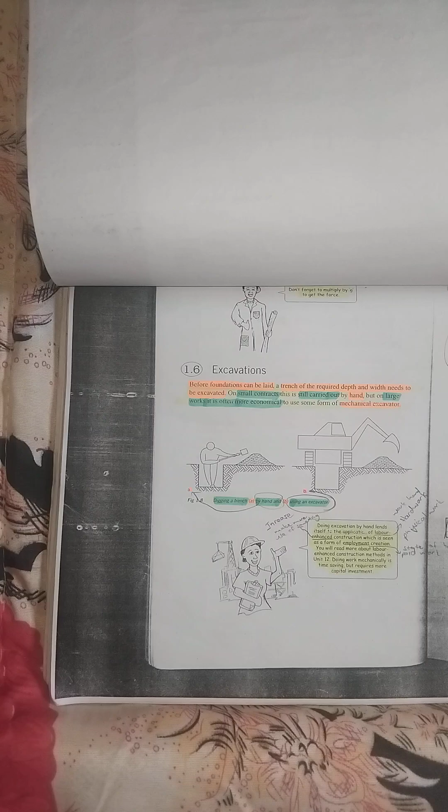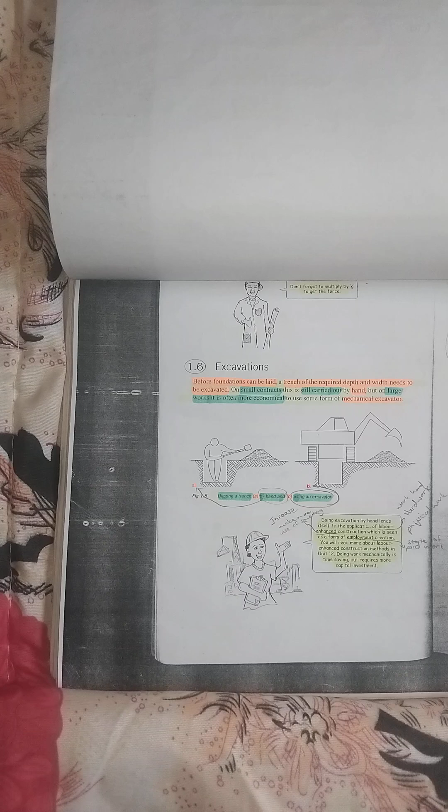Someone commented saying don't forget to multiply by G to get the force. So whenever you multiply mass with gravity, force equals M times A, mass times acceleration, and force equals M times G as well, mass times gravity. For those that know that formula, I think that's Newton's law, the one that states F equals M times A. And then you get the one that states F equals M times G.

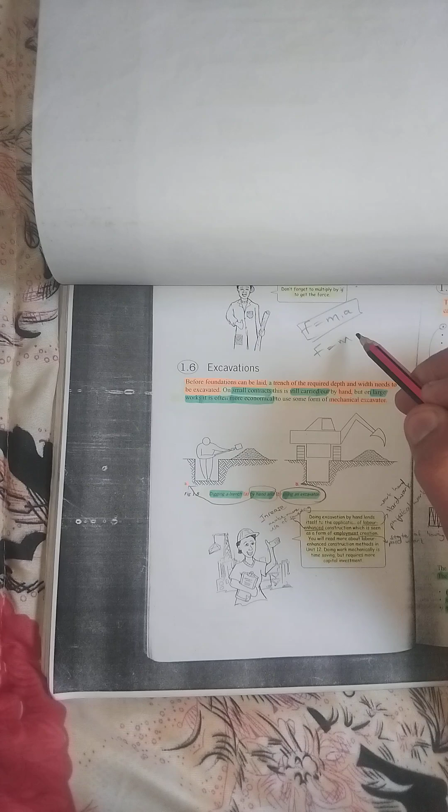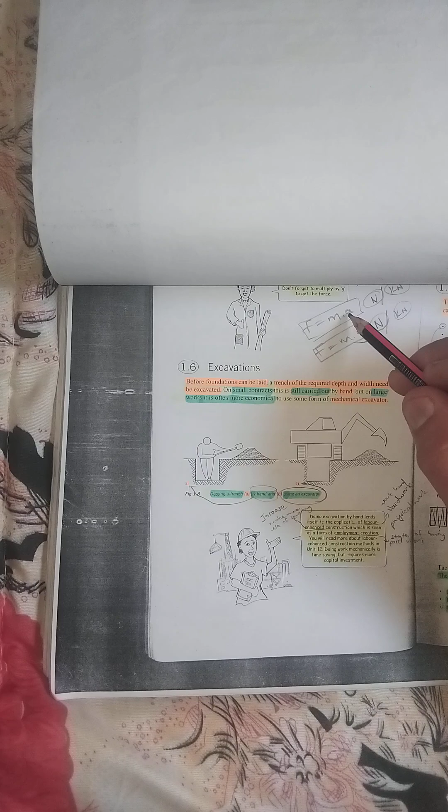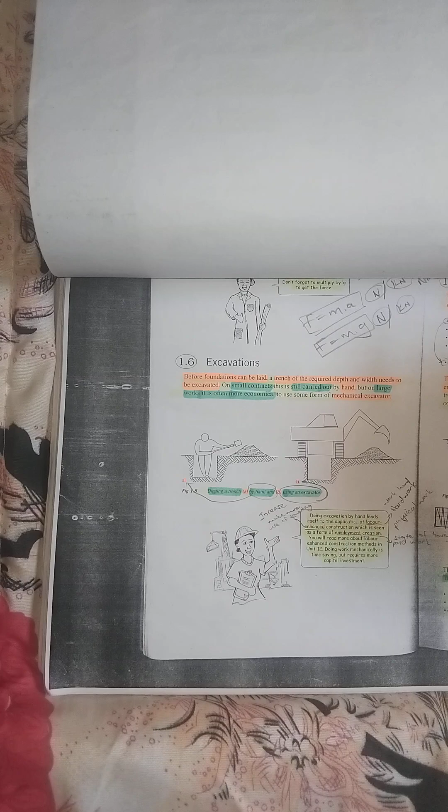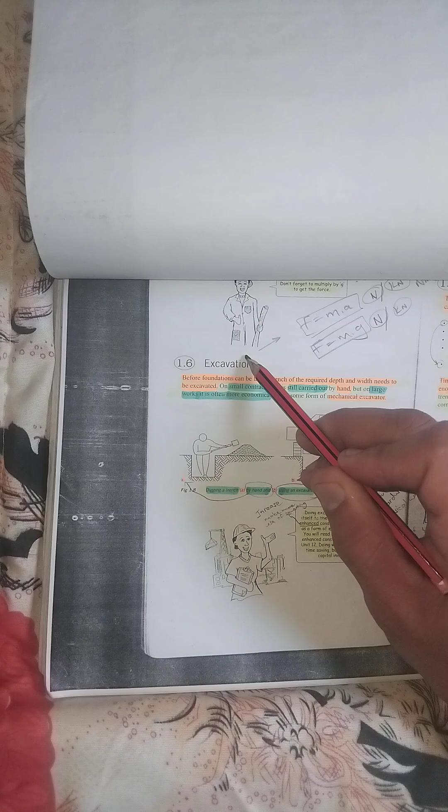Usually this is the system that we use for a car, so mass times acceleration will give you the force in a certain direction. Let's say that car is driving, and that car is a type of mass, but it's accelerating at a certain speed, and there's a force in a certain direction if it's going that way.

Same with mass times gravity. If there's a brick with a certain kilogram somewhere on a building, and it falls off the building, it's accelerating at a force, and that's the gravity law, mass times gravity. Mass times gravity, and that's how you get the force.

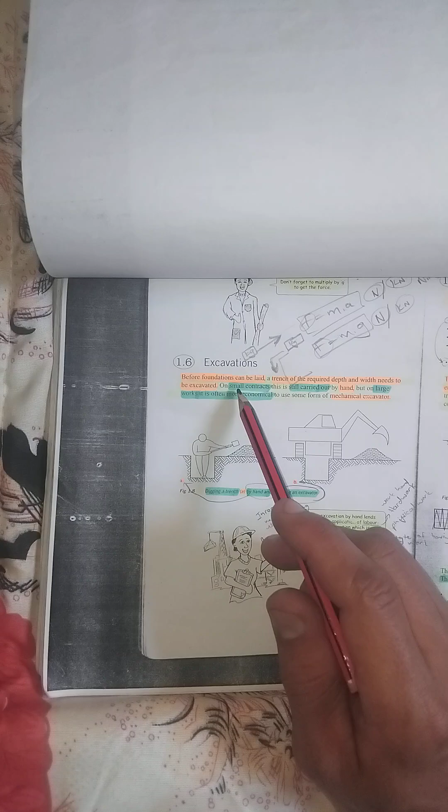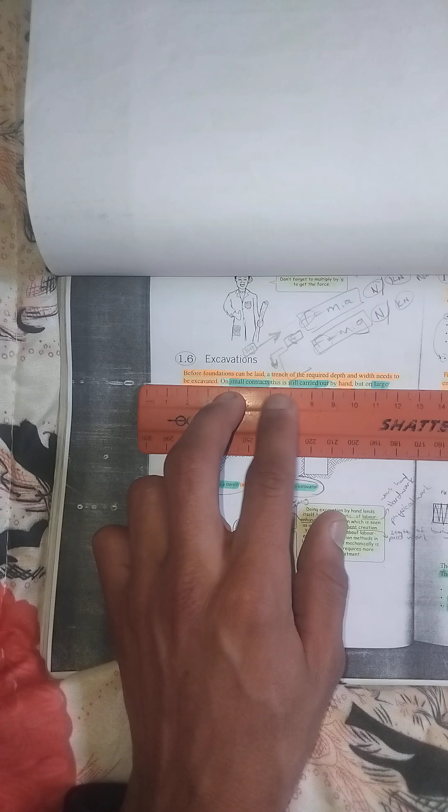Okay, so let's start. Before foundations can be laid, a trench of the required depth and width needs to be excavated. On small contracts, this is still carried out by hand, but on large works it is often more economical to use some form of mechanical excavator.

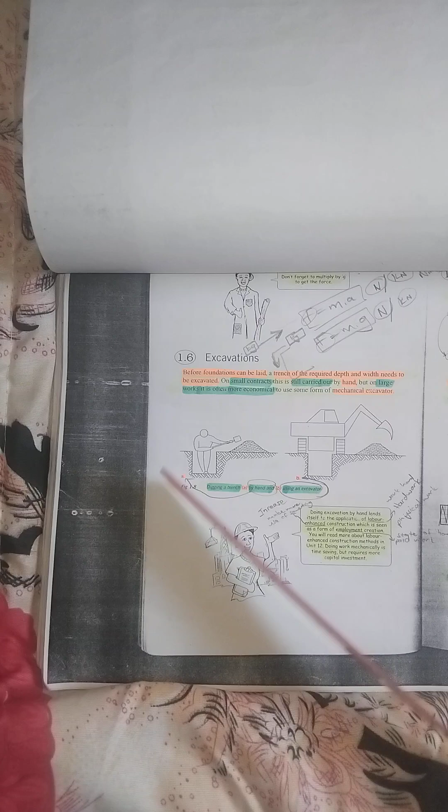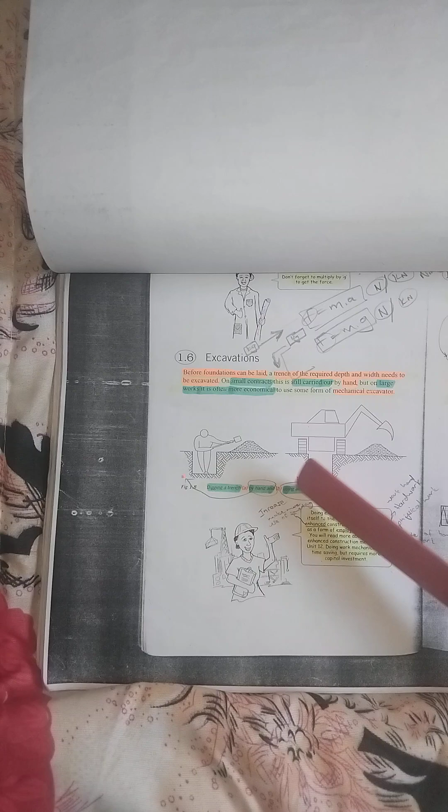So what they're saying is that on small contracts, excavations can still be carried out by hand because then it's not that difficult, and there aren't a lot of trenches. But whenever you deal with a big project, you should consider mechanical excavators, because then it's more economical.

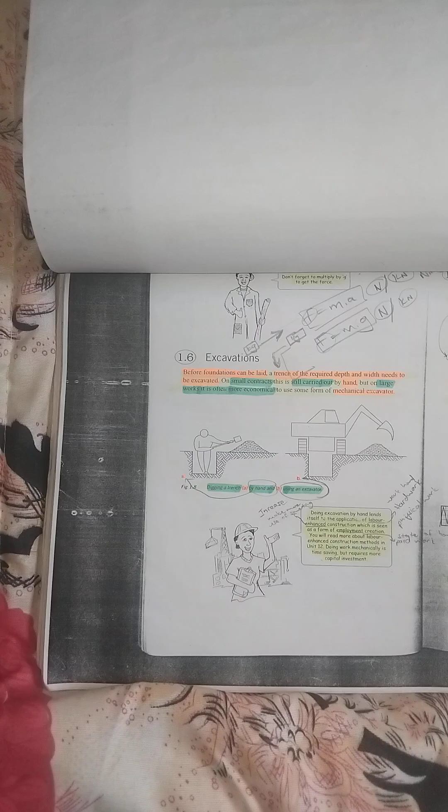And here we can see that they show A as a representation of digging a trench by hand, and B using an excavator.

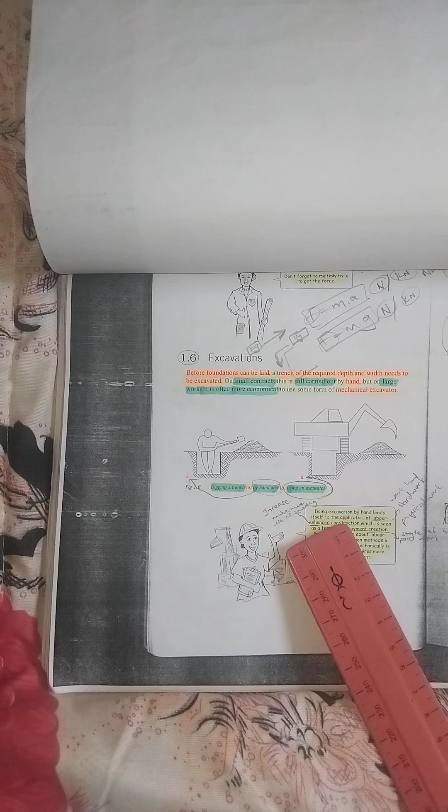Doing excavation by hand lends itself to the application of labor-enhanced construction, which is seen as a form of employment creation. You will read more about labor-enhanced construction methods in Unit 12.

So that's in the coming chapters, the coming units. Doing work mechanically is time saving but requires more capital investment.

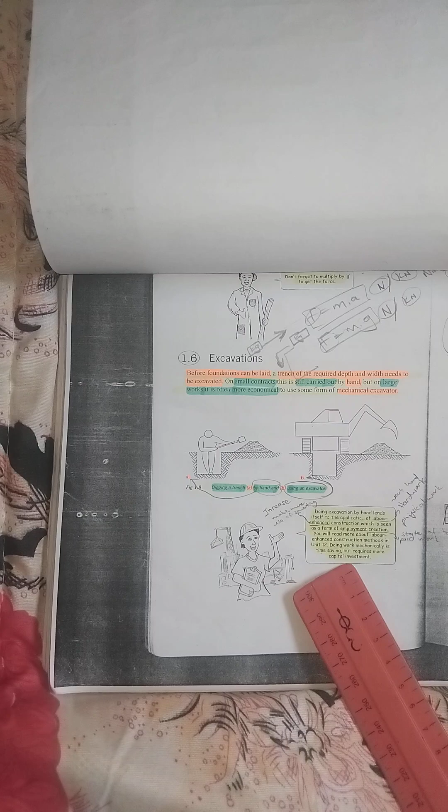Timbering is basically just using timber to box out your trenches. So timbering refers to the temporary supports for the sides of excavations. It is also called planking, strutting, and shoring.

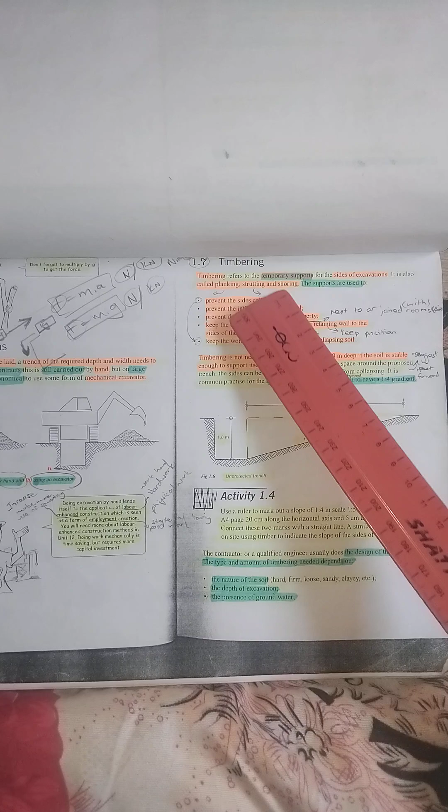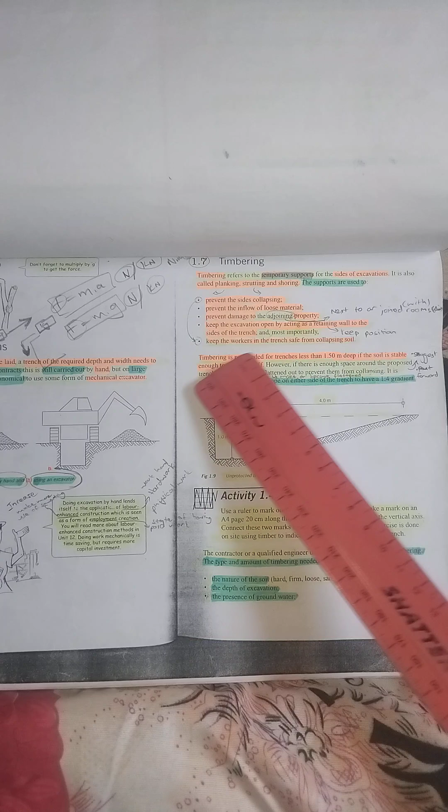The supports are used to prevent the sides from collapsing, prevent the inflow of loose material, prevent damage to the adjoining property next to the excavation, keep the excavation open by acting as a retaining wall to the side of the trench, and most importantly, keep the workers in the trench safe from collapsing soil.

So timbering is not needed for trenches less than 1.5 meters deep, if the soil is stable enough to support itself. However, if there is enough space around the proposed trench, the sides can be flattened.

It can be flattened out to prevent them from collapsing. It is common practice for the slope on either side of the trench to have a 1:4 gradient. So that's what they mean.

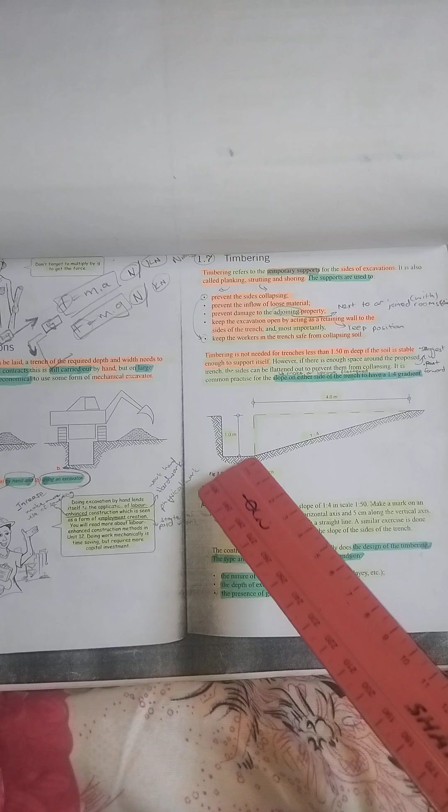If there's enough space around the proposed trench, so if you have a site and you're busy digging trenches and there's enough space next to the trench, then the sides can be flattened, maybe this way and that way, with a slope of 1:4. So for every 1 meter rise, you have a 4 meter span. You can span up to 4 meters for every 1 meter that you go up.

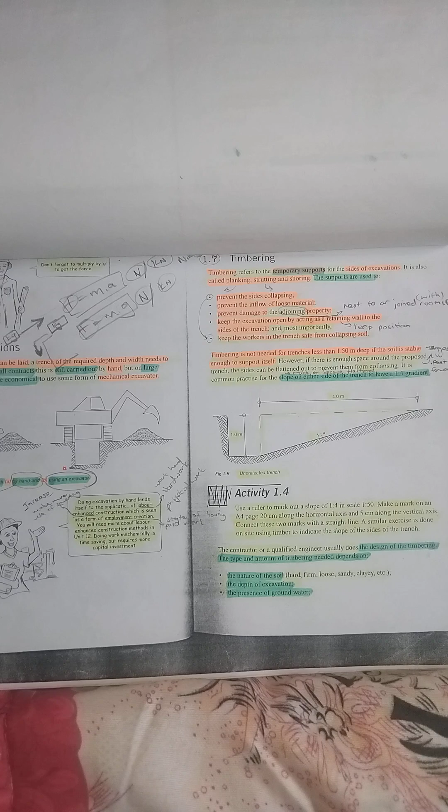And they also say that it's common practice for the slope on either side of the trench to have a 1:4 gradient, on either side.

And currently this is an unprotected trench.

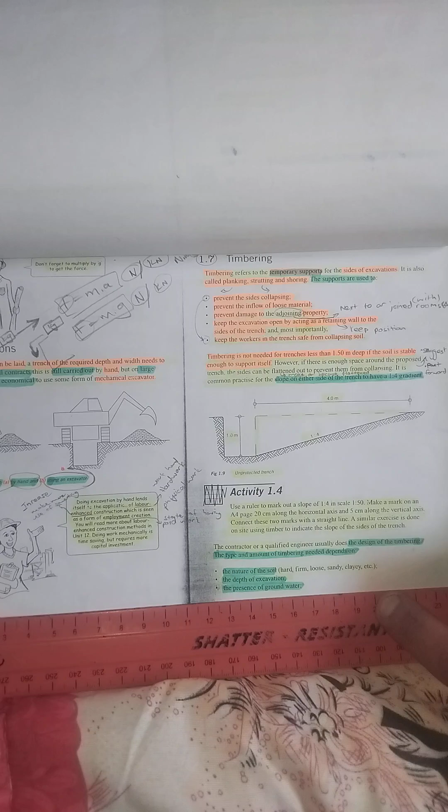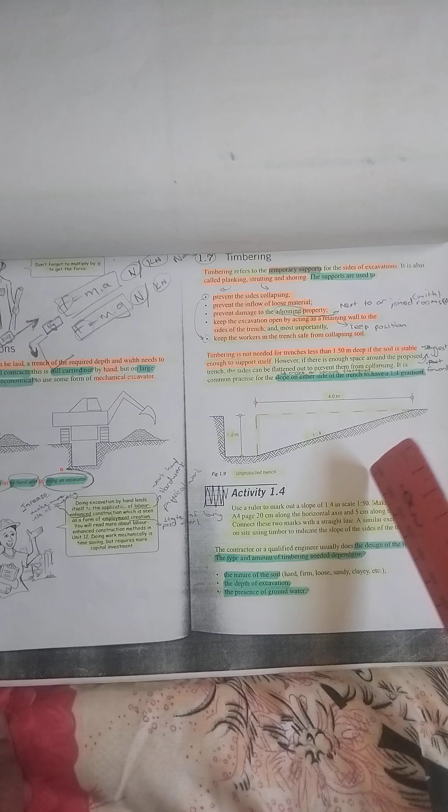Okay, so basically this is just an activity, but it's stating that you should use 20 centimeters in your horizontal plane, and then 5 centimeters in your vertical plane, and then you should just join the two lines to two end points, and then you will get the slope. That's basically what this activity is saying.

But then you should use a ruler to make out a slope of 1:4 in scale 1:50. Make a mark on an A4 page 20 centimeters along the horizontal axis and 5 centimeters along the vertical axis. Connect these two marks with a straight line.

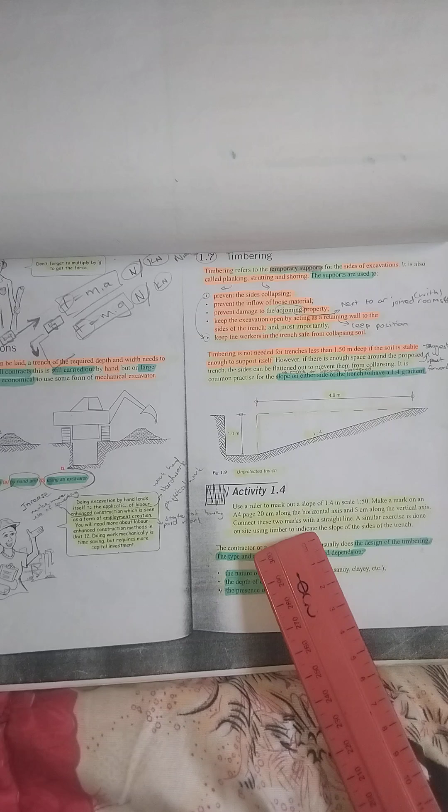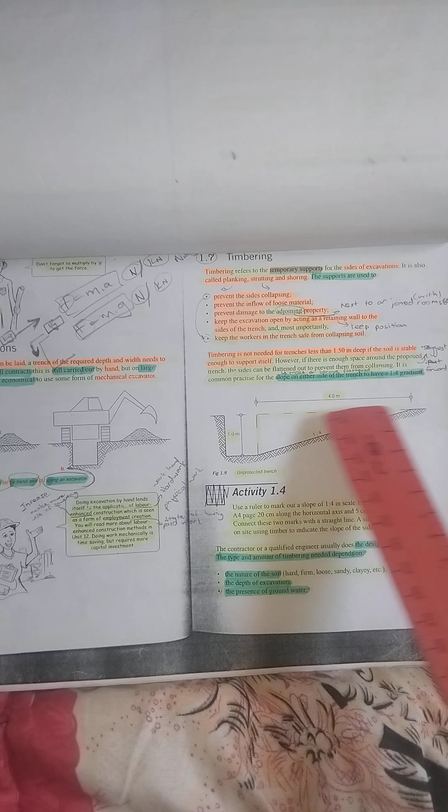A similar exercise is done on site using timber to indicate the slope of the sides of the trench. So I'm not going to do that activity, but it's basically almost the same as this: 5 centimeters vertical, and then 20 centimeters horizontally, and then you just join the 2 points, and you get the slope of whatever.

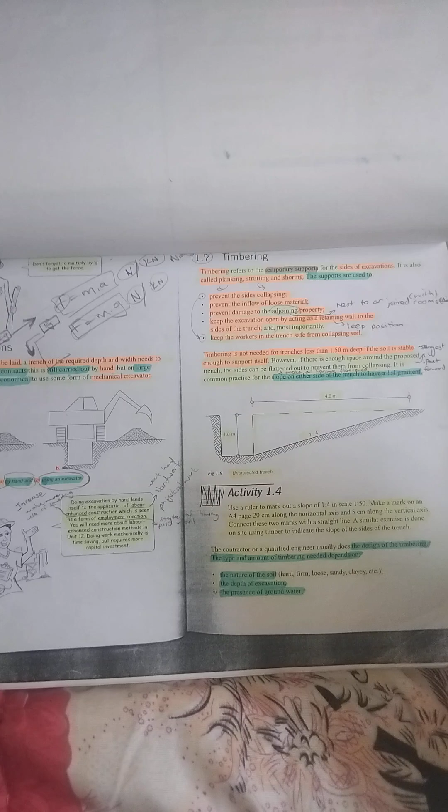So in this case it was 5 on the y and 20 on the x, so the slope is 1:4. That's how they got to 1:4.

So the contractor or a qualified engineer usually does the design of the timbering. The type and amount of timbering needed depends on the nature of the soil, which means if it's hard, firm, loose, sandy, clay, etc.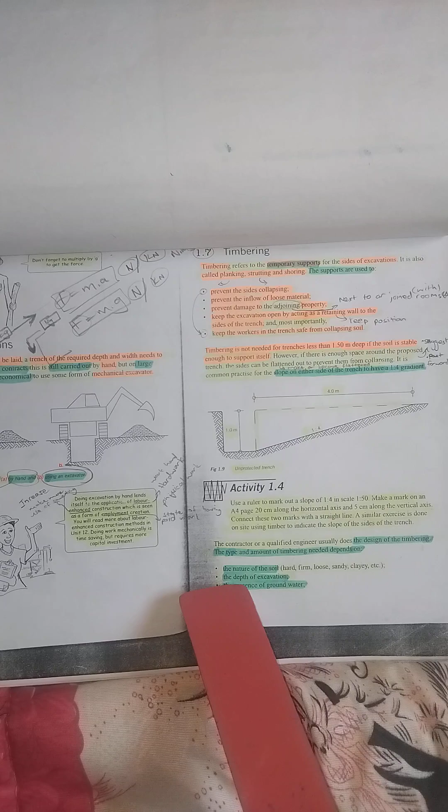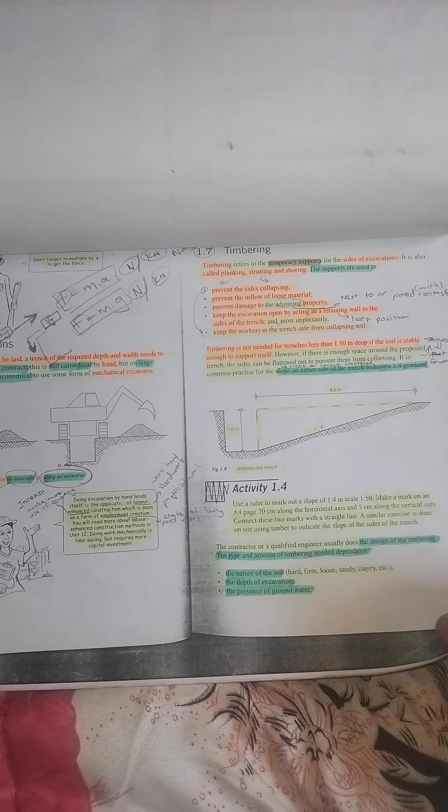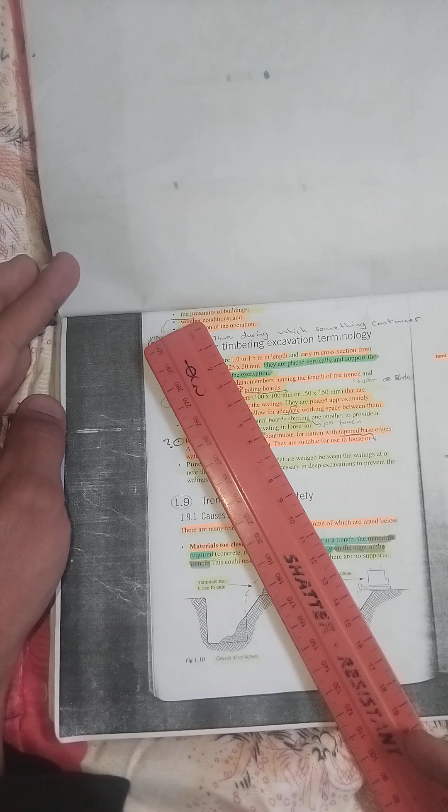The depth of excavation, the presence of groundwater, the proximity of buildings - so how close the buildings are to the excavation - weather conditions, and the duration of the operation, like how long will it be taking place, how long will the trenches be open, all of that.

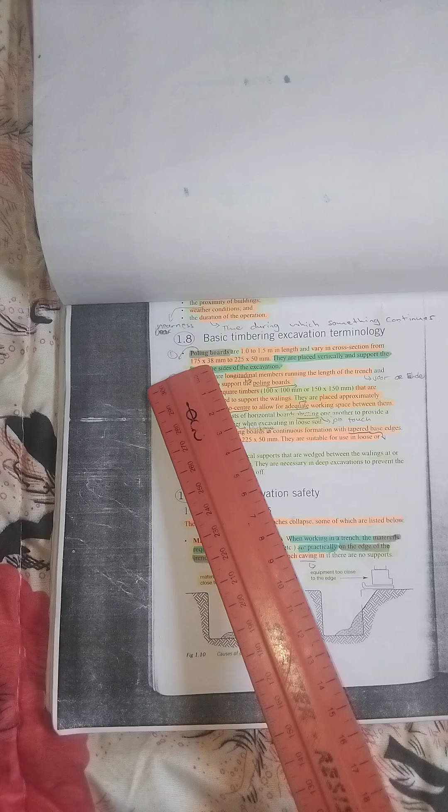Okay, so basic timbering, excavation terminology. Poling boards are 1 to 1.5 meters in length and vary in cross section from 175 by 38 millimeters to 225 by 50 millimeters. They are placed vertically and support the soil at the sides of the excavation.

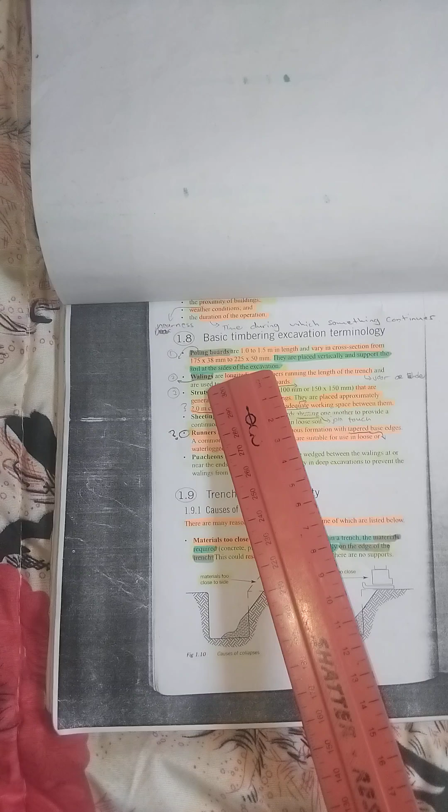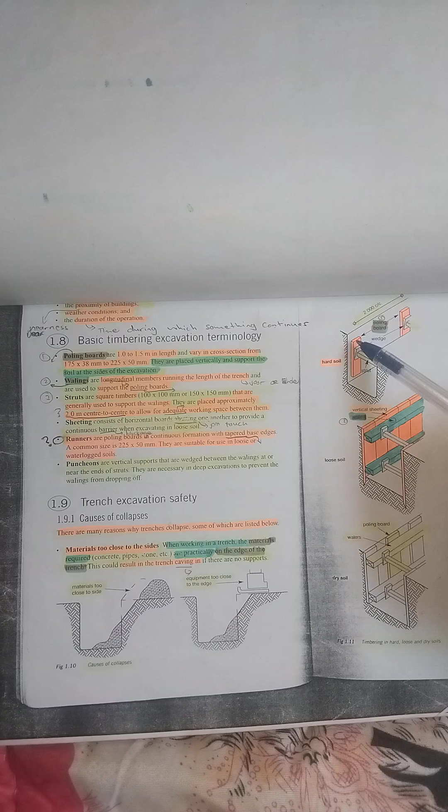So basically what I mean is if we look at this sketch, this is a poling board, that side and that side, the orange ones. Usually they're 1 to 1.5 meters vertically, and the cross section can be 38 by 175 millimeters, or 50 by 225 millimeters.

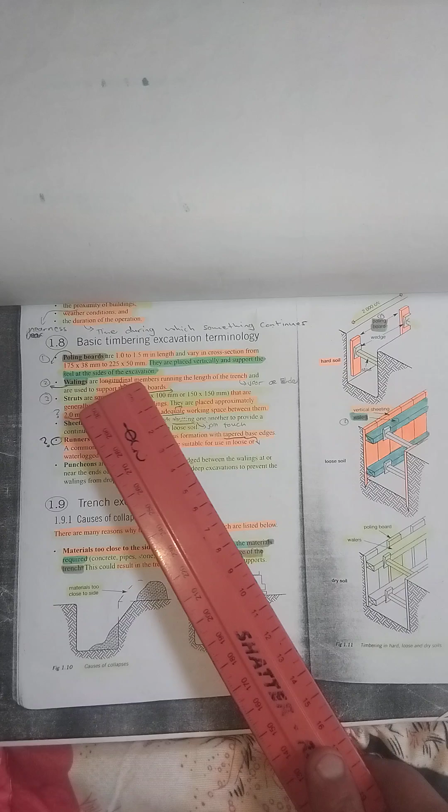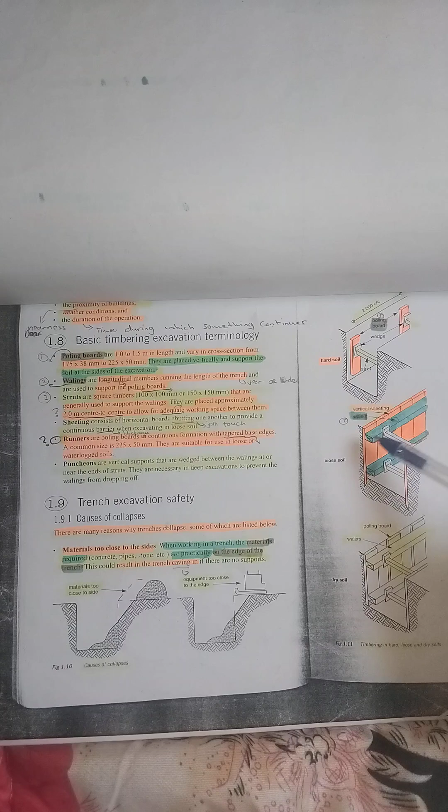And then you also have walings. Walings are longitudinal members, so horizontal members running the length of the trench, used to support the poling boards. In this case, these are the walers or walings, the ones in blue, and they support your poling board. The poling boards are the vertical ones, the orange ones, and your walers just support the vertical sheets, the poling board.

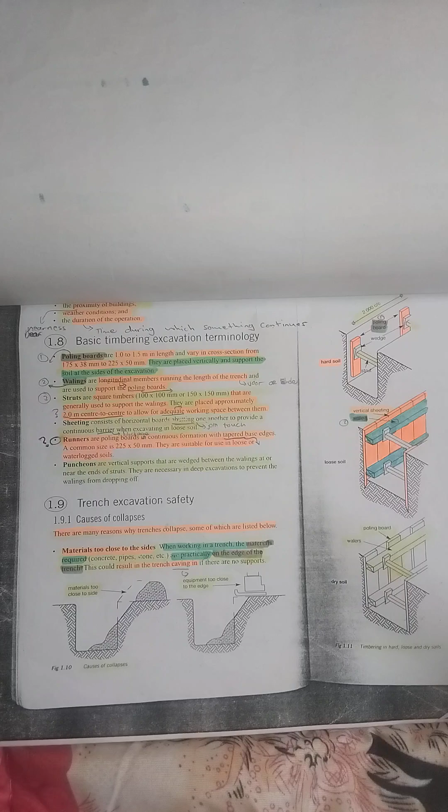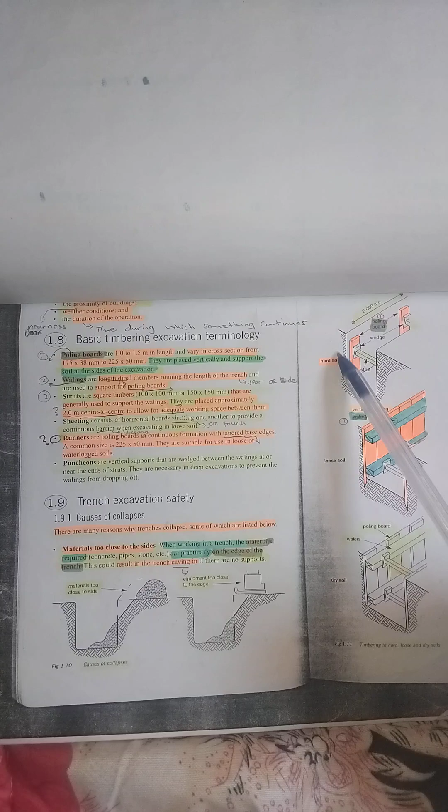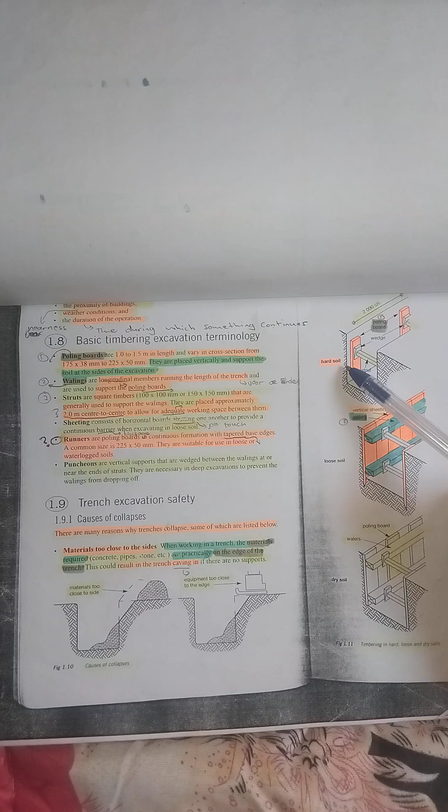And usually the conditions here, this one you use for loose soil, and this one you use when you have hard soil. But I'm assuming hard soil conditions can also be wet, like when it's very rocky but wet, like near a river - but the soil is very hard.

This is if you have loose soil, and then you get dry soil - maybe it's hard soil but dry, or loose soil but also dry conditions. I'm assuming dry soil conditions can be stable, it's hard soil but dry. For this it can be wet as well, the soil can be wet, it doesn't matter.

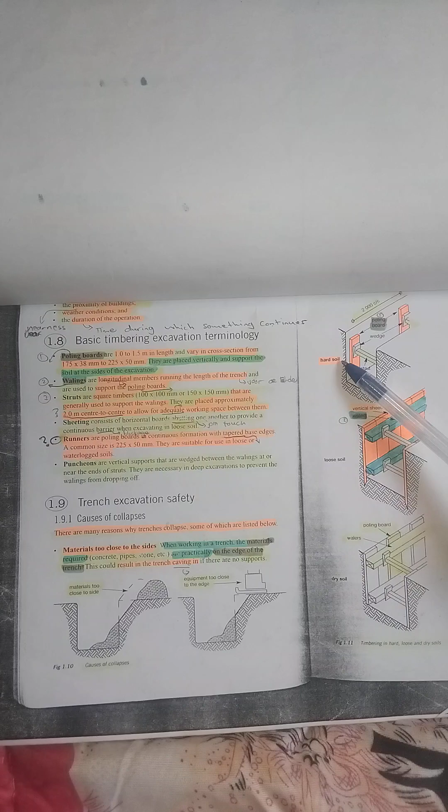Like according to your engineering design, maybe geographical studies show the soil is hard, then you don't need to use a lot of poling boards even if it's a wet condition. But if it's dry soil and the soil conditions, due to your studies, aren't stable, then you have to put poling boards maybe every second phase.

Let's say this is a phase, first phase, second phase, or you leave a space open in your second phase, then you put a poling board. That's what I'm assuming.

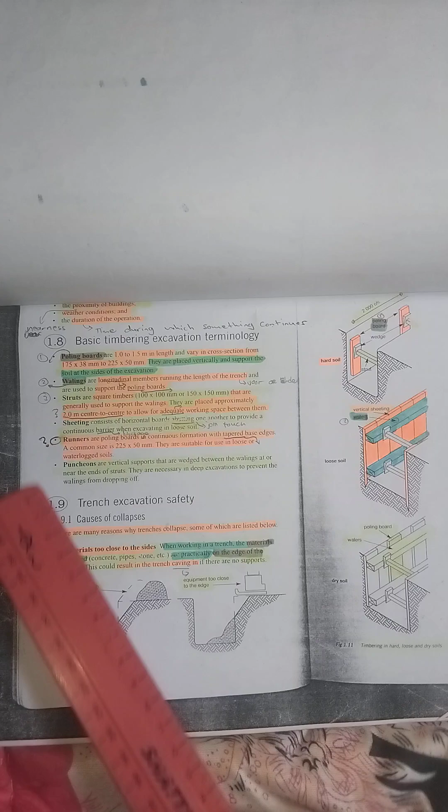So let's just see what they see as a strut. In this case, struts are square timber, 100 by 100 millimeters or 150 by 150 millimeters, that are generally used to support the walings.

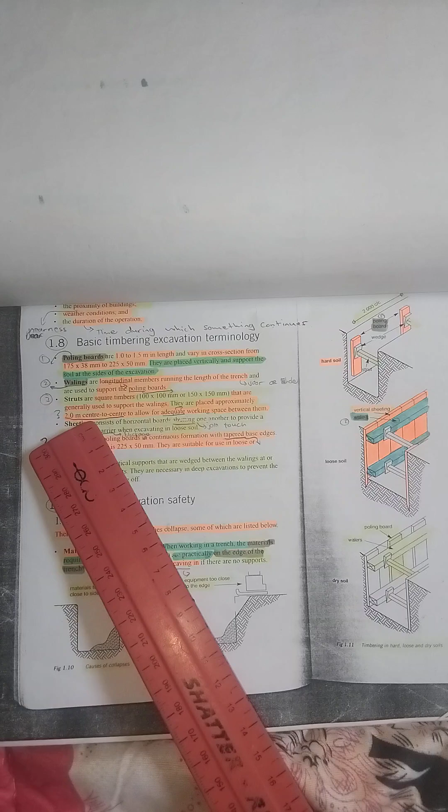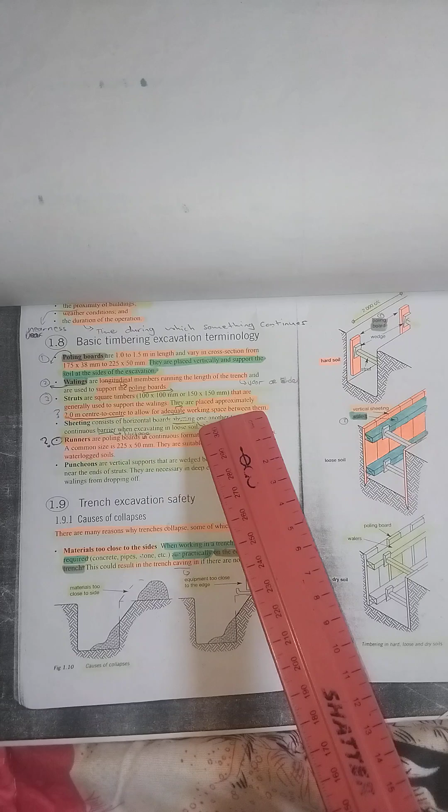They are placed approximately 2 meters center to center, which means 2 meters, 2 meters, 2 meters, if the trench is running in that way, center to center, to allow for adequate working space between them, so that the trench workers, the people in the trench, or maybe the excavator doesn't make contact.

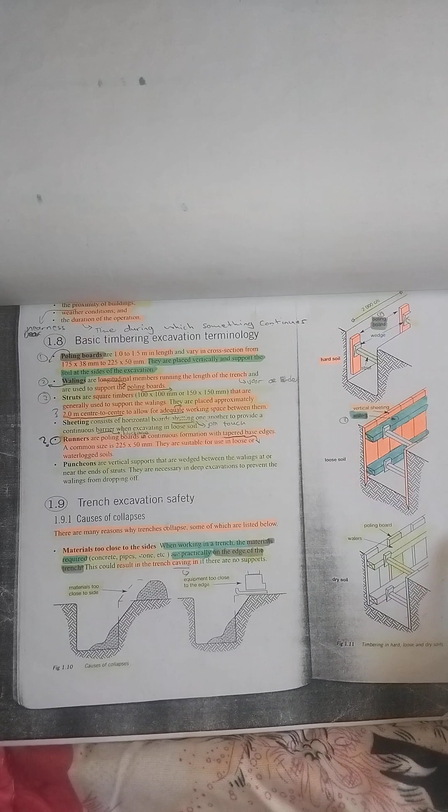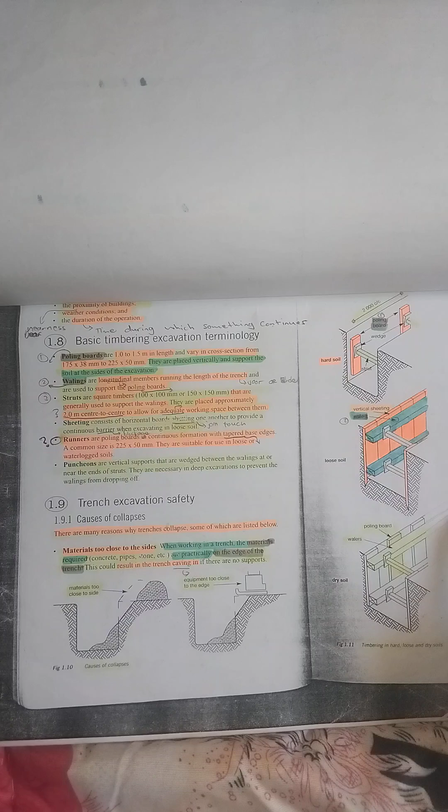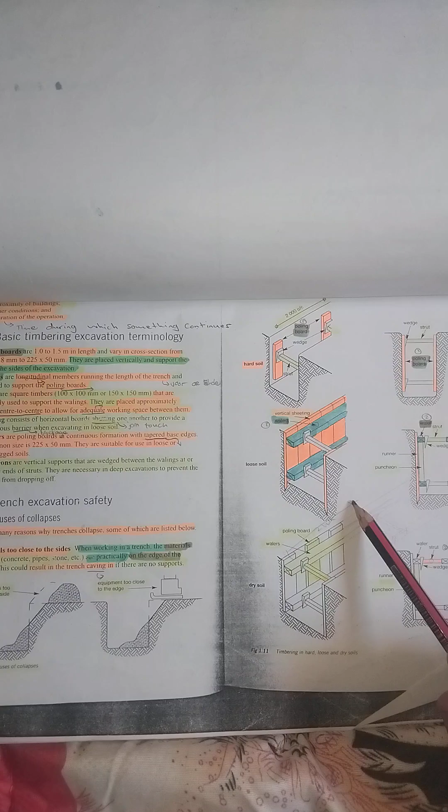So every 2 meters you have, like if the trench continued in this direction, you would have had one sitting here, and you would have had one sitting here as well. So the distance from here to there would have been 2 meters. Every 2 meters you would have had one. That was that board. So it would have been like if this was another strut, 2 meters apart from each other, if the trench had to continue in that direction.

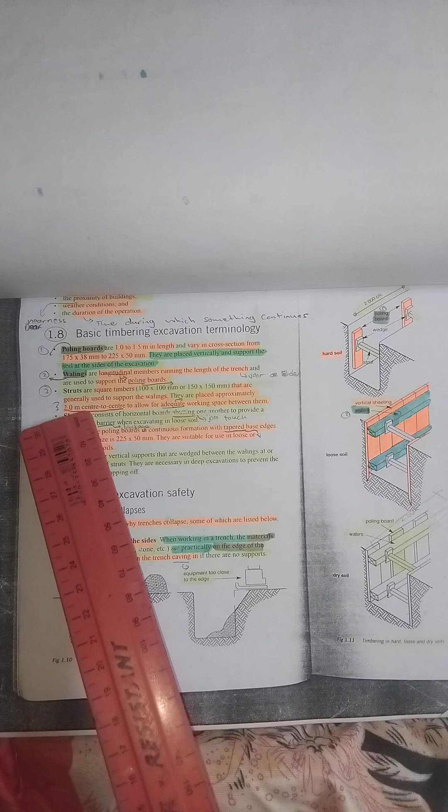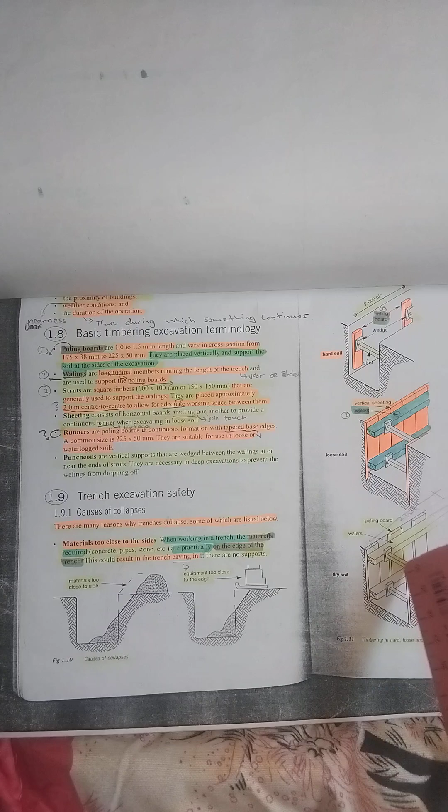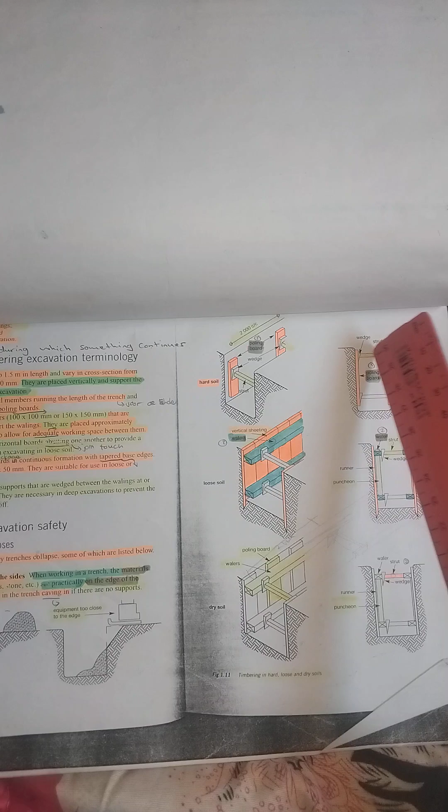So basically the strut, the one that I just went over now, that says it's 100 by 100 millimeter or 150 by 150, is that square piece, the yellow one. It's the yellow one, sitting there. We call that a strut. That's the strut there, the yellow piece here.

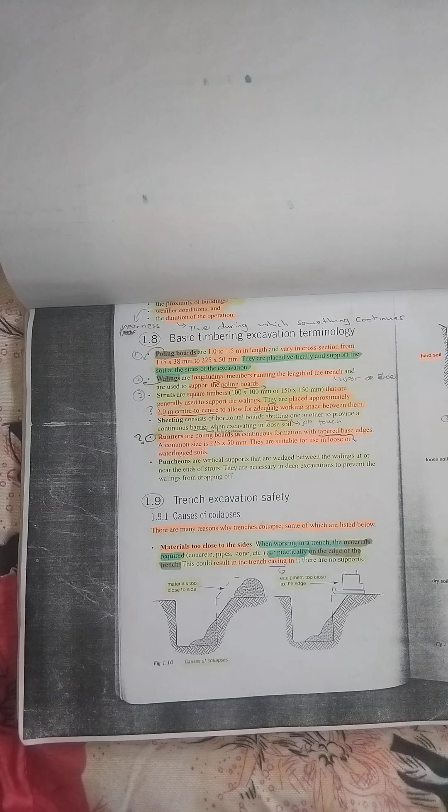So it is basically causing a force onto your walings, onto the blue sections. So it's basically just preventing the trench from collapsing. So that's the one supporting.

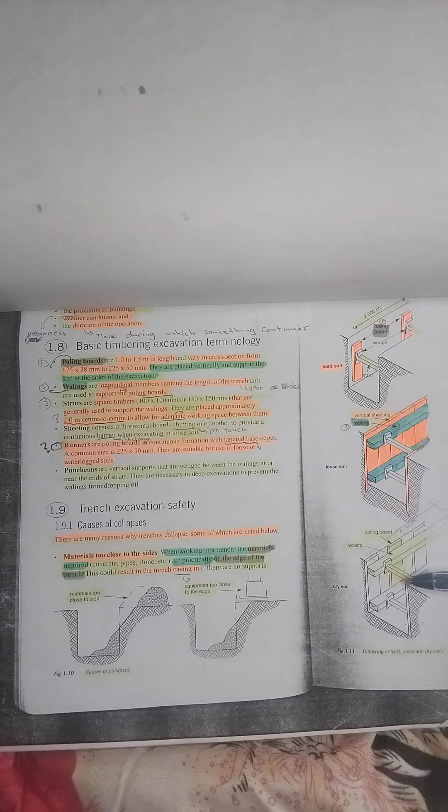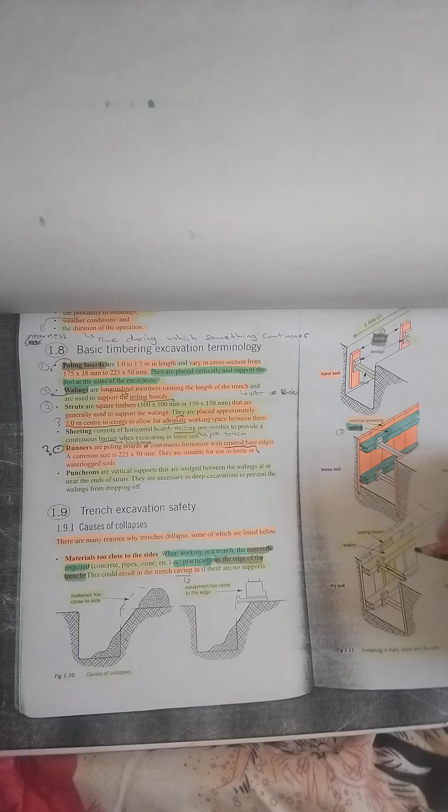This is the one that's supposed to be, depending on your conditions also, you can change the thickness of the cross section for your strut, because that's also going to increase your force. Your force is going out, like keeping the wall intact, or preventing the trench from collapsing, if you want to put it that way.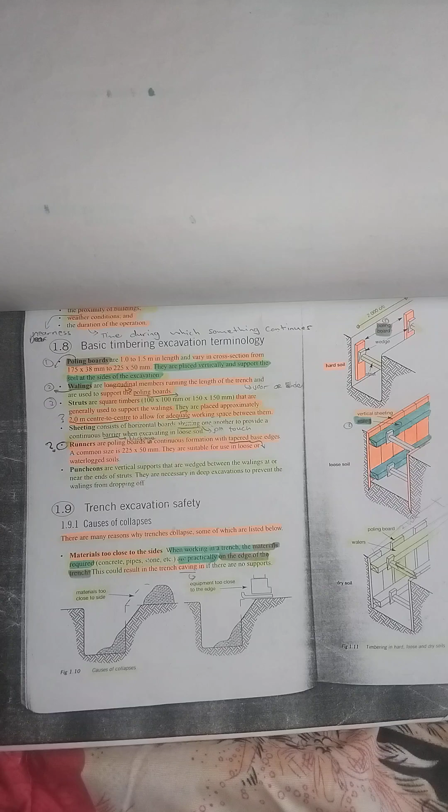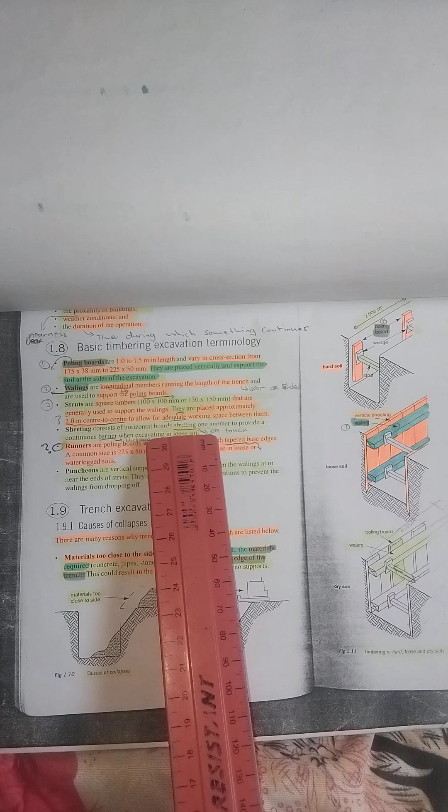So sheetings, they say sheetings consists of horizontal boards abutting, joining trenches, abutting just means being next to each other, joining one another, to provide a continuous barrier, a blockage when excavating in loose soil.

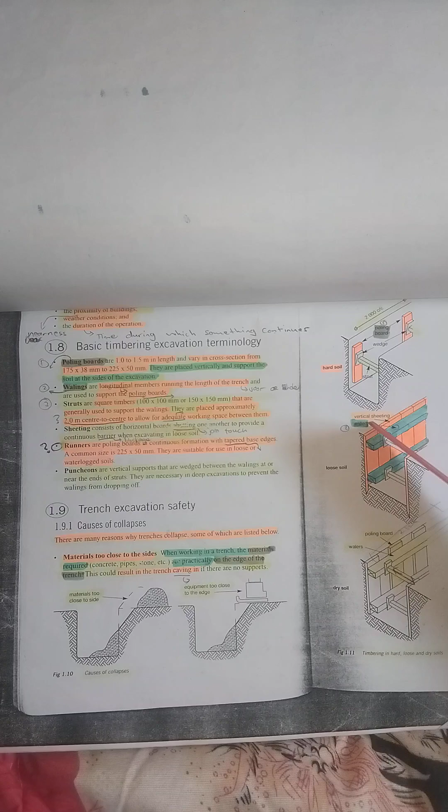So that's basically what you see here, your vertical sheetings, because that's what they said. They said sheetings, so the main word is sheetings. This is just vertical sheetings, to prevent loose soil from falling into the trench if you have loose soil.

Now they say runners. I'm not sure if you can say a runner is a poling board, but they say runners are poling boards. So the runners are the poling boards, but it's the same thing, in continuous formation. So runners are just poling boards, but in continuous formation.

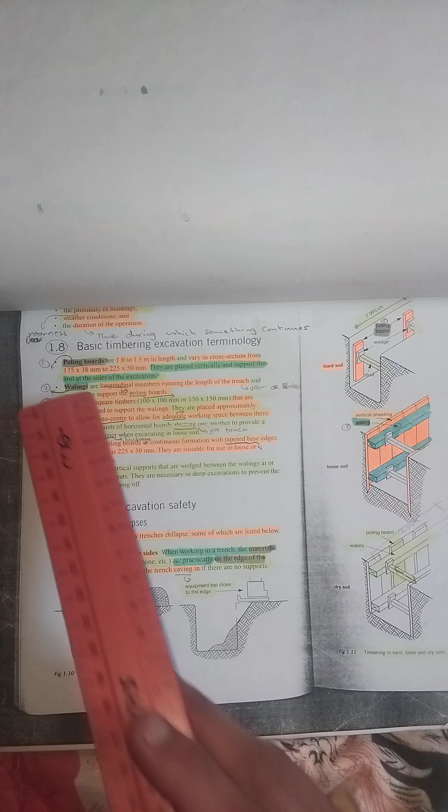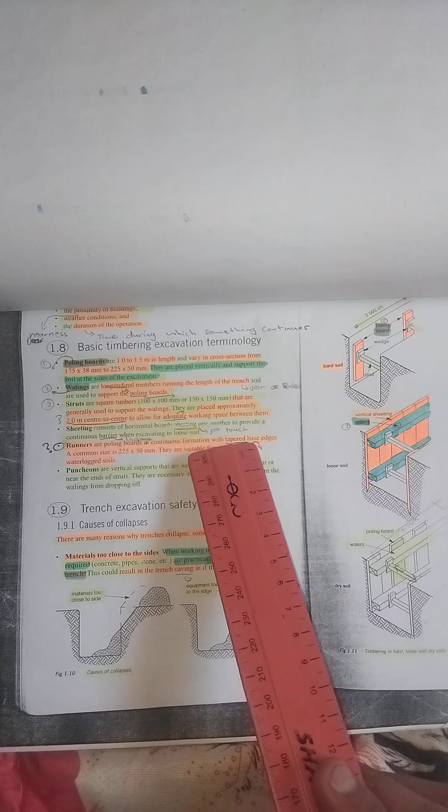So in this case, this is runners. This is just normal poling boards if they're not continuous, the same as when you place one, skip one, place one, skip one - we just call it poling boards. But the moment we put them continuously, running next to each other, we call them runners. It's just another term for poling boards next to each other in continuous formation with tapered base edges.

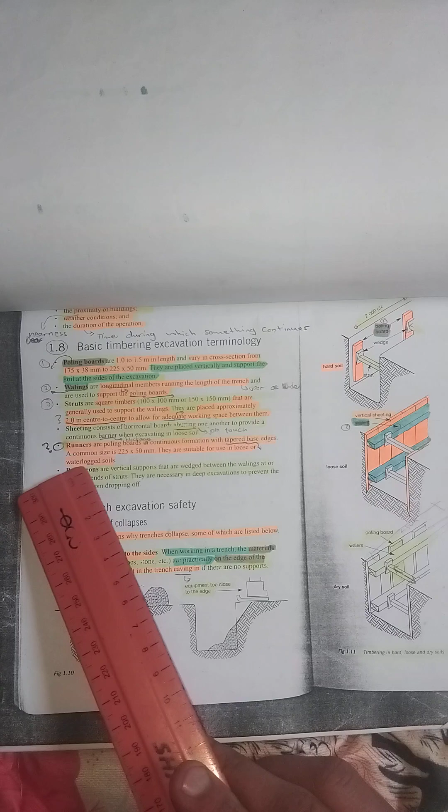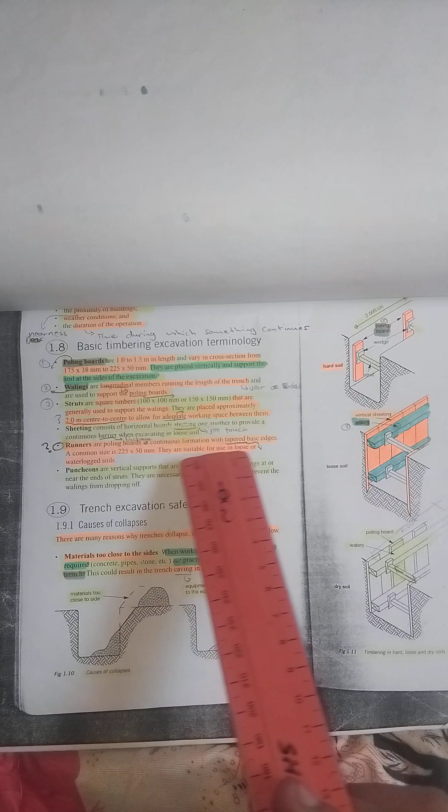A common size is 225 by 50 millimeters. They are suitable for use in loose or waterlogged soils. So they are suitable for using, usually we use them when we have loose soil or when there's waterlogged soils, like we said, loose soil.

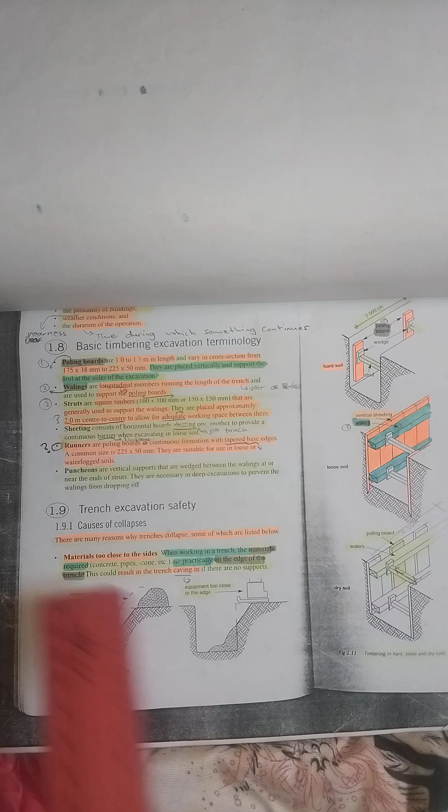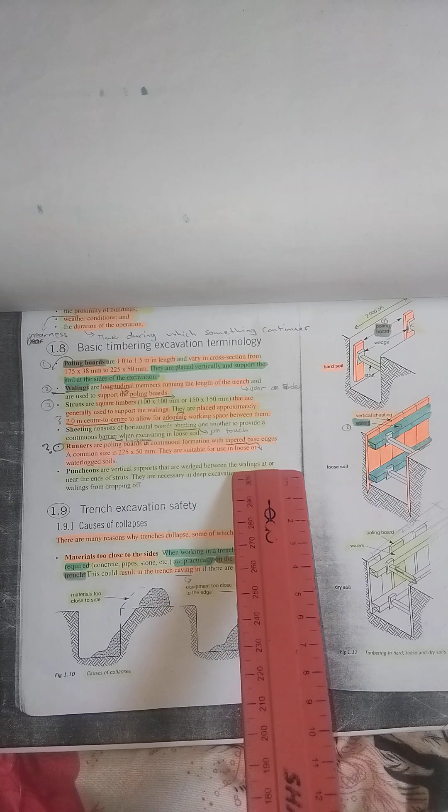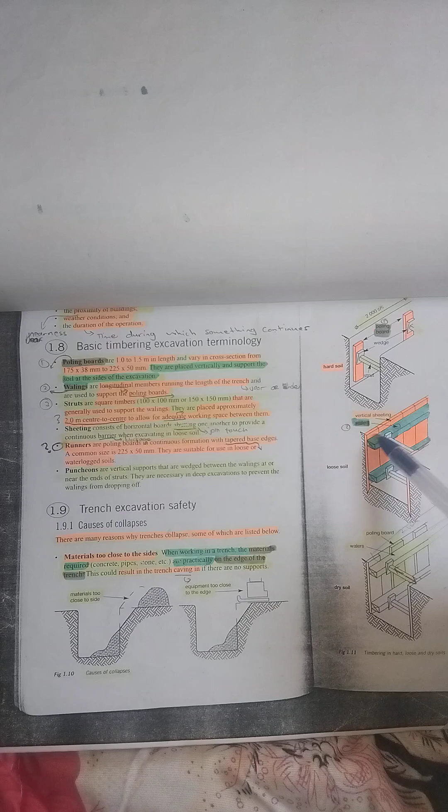So puncheons, I don't know if I'm pronouncing it right. Puncheons are vertical supports that are wedged between the walings at or near the ends of struts. They are necessary in deep excavations to prevent the walings from dropping off. So we know that this is your walings, so for deep excavations, that's when we're going to use them.

They are just like vertical supports, sitting between your walings. Let me just see if I can move it this way. There you have a puncheon. It's this one here, vertically.

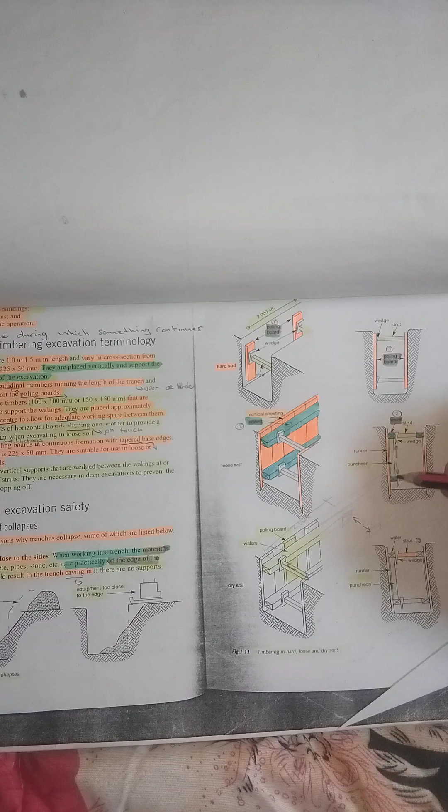So they basically cause a force in that direction, so that your top waling doesn't fall down. Or let's say there's a load placed on that waling, so that it doesn't fall down. And in a way, it's also keeping your strut in place, extra support, but the main reason is so that the waling doesn't fall down.

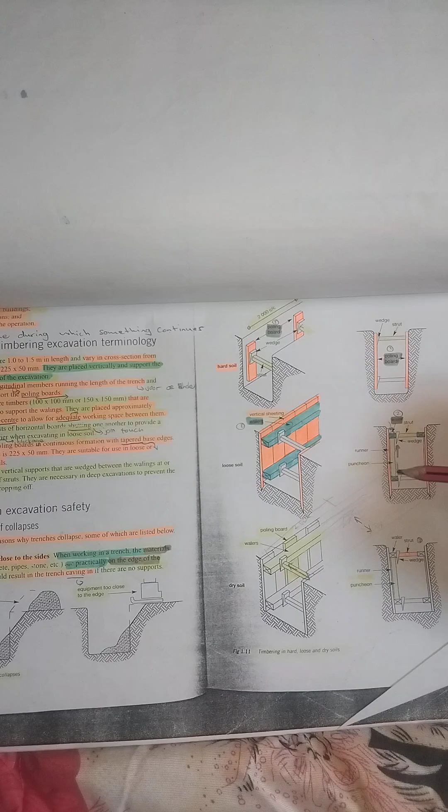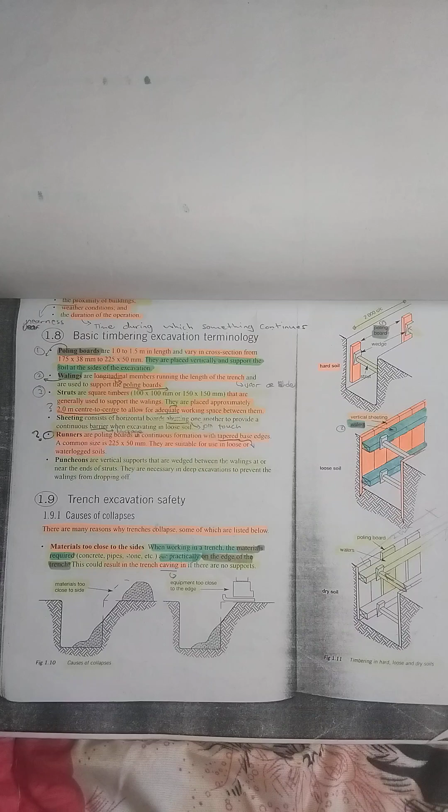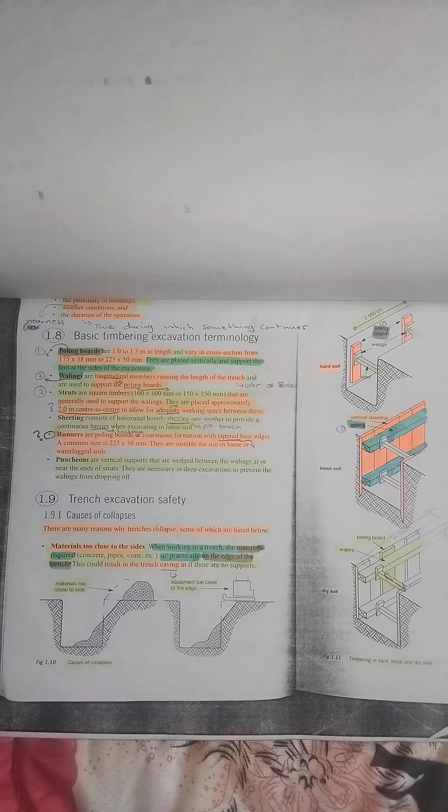Then that's it. They are necessary in deep excavations to prevent the walings from dropping off. So we'll continue on the next video, part 2, where we will continue on trench excavation safety.